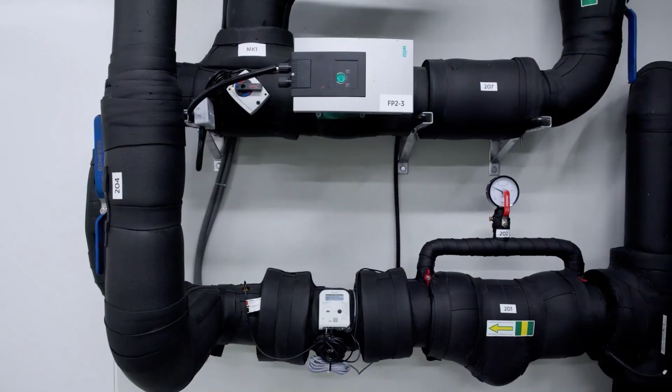This innovative project, developed by the Kaunas University of Technology, KTU, Faculty of Civil Engineering and Architecture Centre for Smart Cities and Infrastructure, focuses on monitoring and managing the CO2 emissions, energy consumption, and indoor climate of the KTU campus buildings. By leveraging state-of-the-art digitization technologies, the project aims to significantly reduce the carbon footprint and enhance the sustainability of the university's infrastructure.

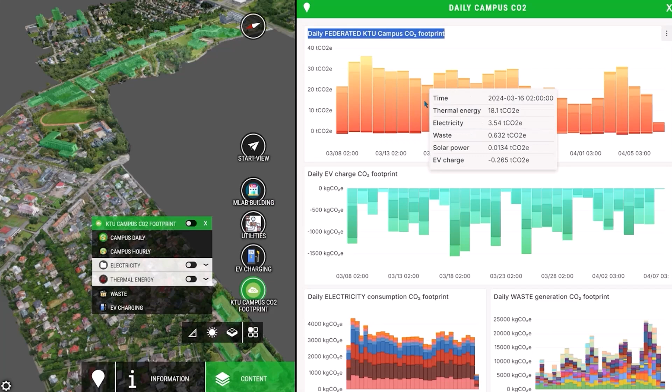The project exemplifies innovation and creativity by integrating advanced technologies such as reality capture, Internet of Things (IoT), building information modeling (BIM), data science, and the use of AI to predict energy consumption and carbon footprint.

The team utilized Bentley Open Buildings Designer to create semantically rich BIM models, iTwin Capture for reality capture, and the iTwin platform for high-level customization and data visualization. OpenCities Planner served as the project's main platform, integrating digital outputs from various software tools and APIs.

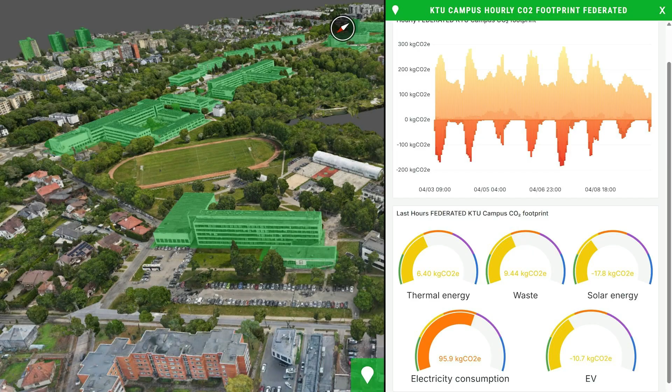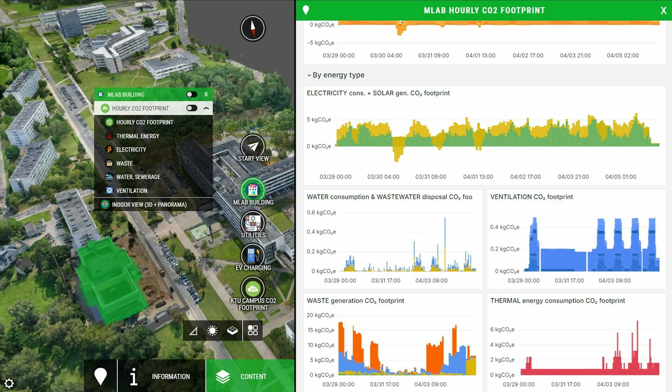By just monitoring and making visible energy, water consumption, wastewater, occupancy temperature, relative humidity, air volume, lighting, noise, CO2 levels, and other significant indicators, KTU is changing behaviors that are resulting in more responsible use and investment in clean energy sources.

In March 2024, the operational CO2 footprint of the KTU campus buildings consisted of 80% thermal energy for heating and hot water, and the installation of solar power plants and EV charging stations contributed to an 11% reduction in the carbon footprint.

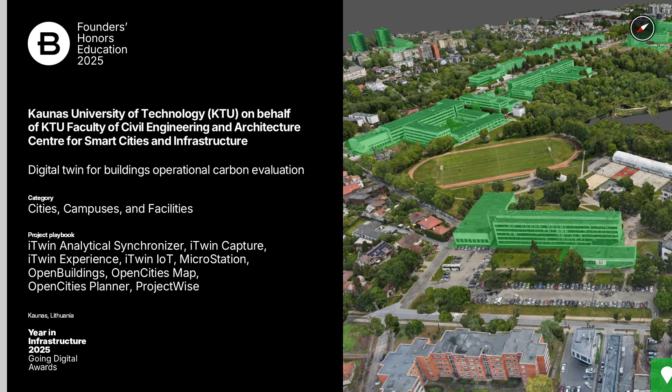Congratulations to the Kaunas University of Technology for winning a Founder's Honor. Your dedication to innovation, sustainability, and excellence sets a new standard for the future of infrastructure.

I am pleased to recognize Cornell University's Environmental Systems Lab for a Founder's Honor for their work on the Energy Atlas, a digital twin for decarbonizing Ithaca's building stock.

This groundbreaking project is a city-scale building stock energy model developed in close collaboration with the city of Ithaca. It supports building retrofit planning, carbon reduction, and sustainability policy implementation.

The Energy Atlas digital twin integrates open access urban data sets, spatial analytics, and national statistics to construct a bottom-up, physics-based urban building energy model (UBEM), that evaluates and predicts energy consumption across all 5,200 plus buildings in the city.

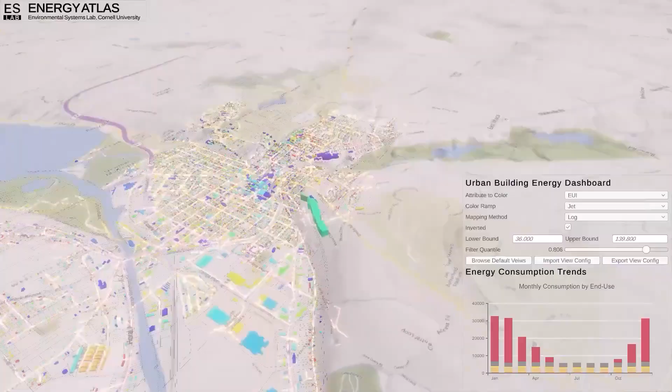The innovation and creativity behind this project are truly commendable. By leveraging artificial intelligence and machine learning, the team has created a high-fidelity digital twin that not only improves simulation accuracy, but also provides critical insights into building energy performance, operational carbon footprints, and retrofit opportunities.

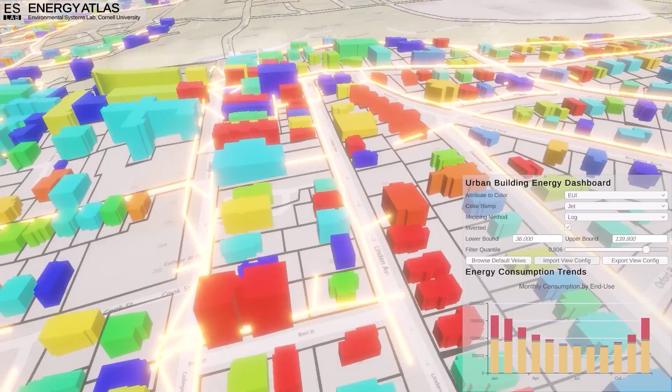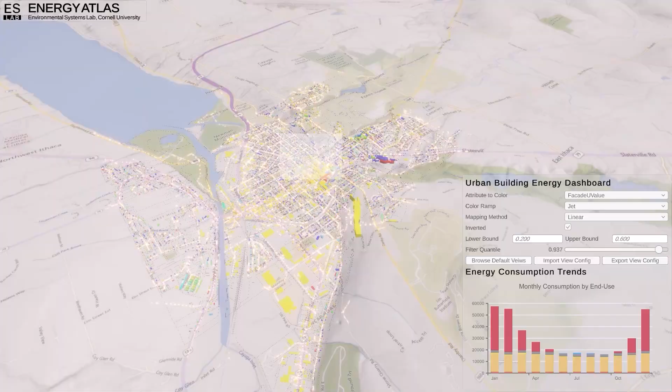This tool empowers city officials, community organizations, and property managers to make data-driven decisions that will significantly impact Ithaca's journey towards full carbon neutrality by 2030.

The use of Bentley Descartes, Cesium, iTwin Capture, and OpenCities Map enabled the team to overcome significant bottlenecks in 3D reconstruction, data interoperability, and model deployment.

The automation of key components in the building reconstruction pipeline saved over 500 work hours, while the integration of Cesium for Unity led to an estimated $500 per month in software API cost savings.

The metrics speak for themselves. The project has the potential to reduce operational carbon emissions by up to 95%, or approximately 104,000 metric tons of carbon dioxide equivalent annually.

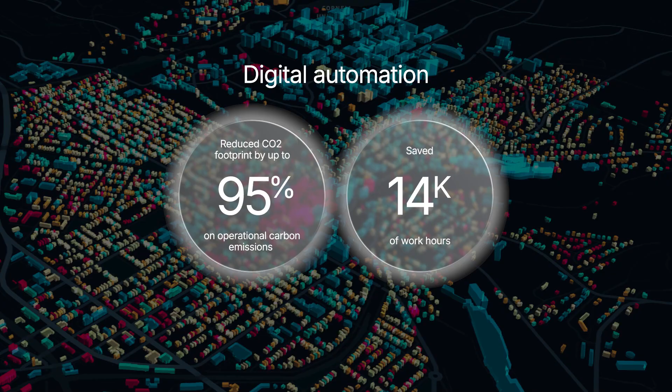Additionally, the use of digital automation saved an estimated 14,000 work hours compared to a fully manual process. These achievements not only highlight the project's efficiency, but also the significant contribution to environmental sustainability.

In conclusion, I would like to extend my heartfelt congratulations to the entire team for their dedication, innovation, and hard work. This project sets a precedence for urban sustainability transitions and serves as an inspiration for other municipalities around the world.

I'm thrilled to recognize citiME's project on micromobility modeling in Abu Dhabi's strategic transport model as the Founders Honors for Sustainability. Abu Dhabi is rethinking urban mobility, and citiME Consultancy is leading the way, integrating walking, biking, and scooter trips into the city's transport planning.

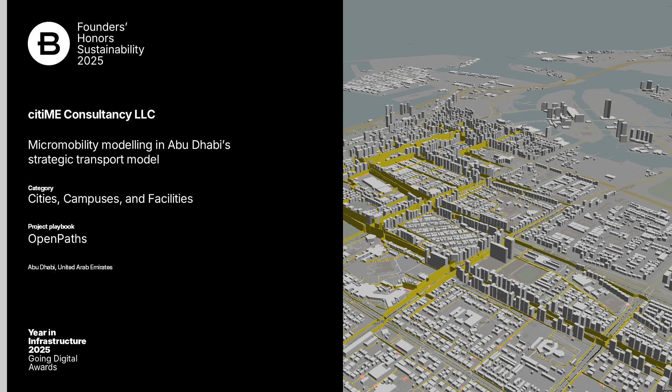citiME's micromobility project uses Bentley OpenPaths to enhance Abu Dhabi's strategic transport model. By accurately capturing short trips, the project helps planners design infrastructure that's efficient, people-friendly, and environmentally sustainable.

Traditional transport models mainly focus on cars, leaving short trips like walking or scootering underrepresented. citiME addressed this with a local area model (LAM), breaking the city into smaller zones to capture how people actually move. They integrated walking, biking, and scooter routes into the network and improved route choice algorithms to reflect real travel behavior.

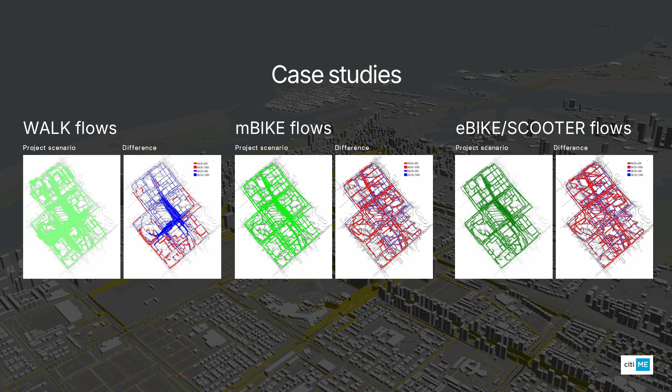The model predicts how people will shift from cars to sustainable modes, helping plan cycle paths, pedestrian routes, and policies that encourage micromobility.

Using OpenPaths and Cube, planners can visualize traffic flows in 3D, evaluate different scenarios, and make data-driven decisions faster. They even integrated additional data, such as building occupancy from energy and water usage to refine travel patterns.

The result is a tool that not only optimizes transport infrastructure, but also enhances social and environmental outcomes. Fewer car trips, healthier streets, and stronger, more connected communities.

Congratulations to citiME Consultancy. This project has set a new benchmark for sustainable, data-driven urban planning. By integrating micromobility into Abu Dhabi's strategic model, citiME and its project are helping the city become more resilient, more connected, and ready for the future.

Over the course of my career, the construction company that I have most looked up to is DPR Construction. DPR has uniquely championed going digital, having institutionalized virtual design and construction (VDC) across their own project portfolio and always advocating for innovative advancements which benefit the state of the art for all.

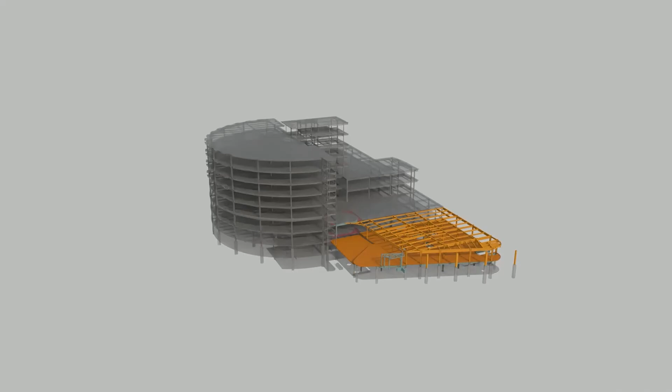That's why I'm particularly appreciative of their nomination of their Hartford, Connecticut Children's Hospital project for its 4D planning with Synchro. DPR is known for surmounting the most challenging projects, but this $300 million hospital addition and expansion is at the extreme, along with adding new capacity for a 50-bed neonatal intensive care unit and especially a rare fetal care and surgery operating room. The infrastructure complexity includes a bridge to a new parking facility.

But it was the schedule and related budget commitments that caused even DPR to seek a creative and unconventional breakthrough beyond their already advanced standard procedures. To save literally months and millions, the permanent rather than temporary heating was to be turned on for interior finishing work before even the final construction documents would be available.

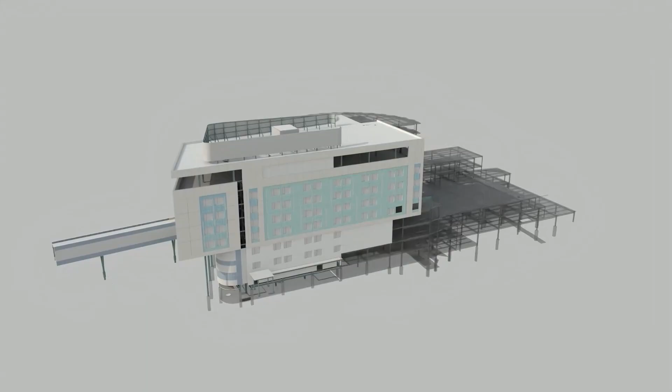DPR describes the redefined workflow which Synchro's 4D capabilities made possible as: plan how you want to build it, then model what you planned, and finally, go build what you modeled.

Using this innovative approach, DPR completed the essential coordination of the mechanical floor a year ahead of schedule, delivering a level of development 400 detailed model 6 months before even beginning work on the steel. The validated construction sequence would then be continuously refined throughout by way of a rolling 5-week fabrication and installation schedule, which created predictability in the labor market.

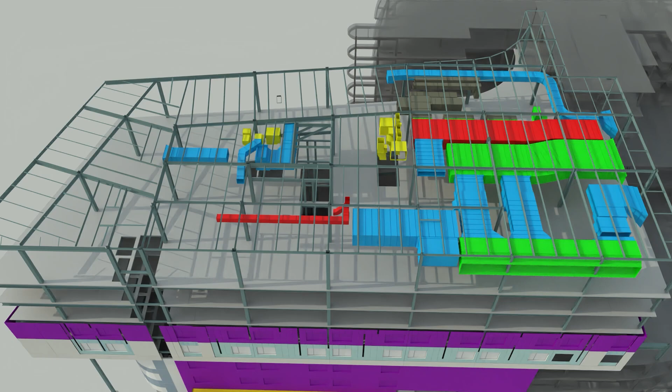Synchro enabled coordination of the 200 on-site workers who understood the visual language better than words. Having precisely predicted what would be installed each week, DPR says, guess what? We hit that weekly production on time, every time.

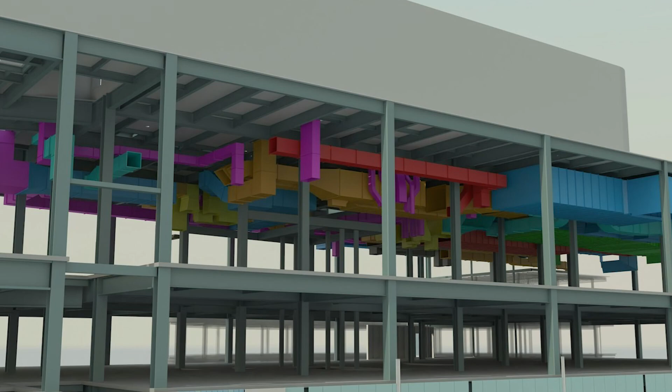You won't be surprised that DPR are experts at quantification and learning about advantages from going digital. See here their reckoning that on this project, which was just completed, among the benefits to improve children's health care in Hartford, coordination efforts, which typically achieve around 5,000 square foot per week on healthcare building projects, were accelerated with Synchro to accomplish 13,000 square feet per week, so that the plan was built before construction documents were even issued.

92% of planned percentage completion was achieved, which DPR applauds as remarkable for such a complex project. DPR estimates that on-site labor productivity was increased by 20% thanks to the 4D modeling and its visualization, and in particular, as to the original motivation to altogether avoid temporary heating, 95% of mechanical, electric, and plumbing (MEP) trade work was completed 6 months ahead of schedule.

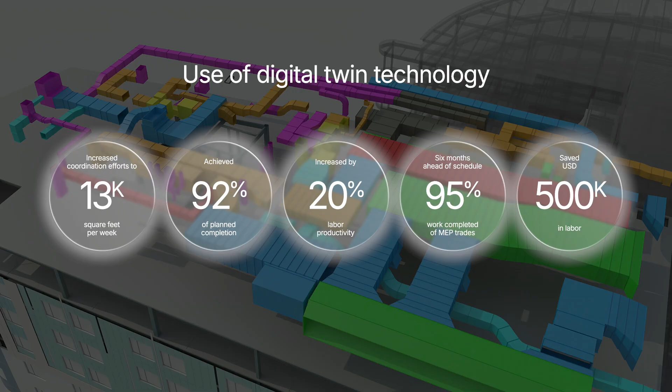And as DPR puts it, digital twin technology was also instrumental in identifying opportunities for cost savings, such as for underground electrical vaults, which allowed for wire pulling before the switchgear was delivered, saving $500,000 in labor.

And here, see DPR's summation of the advantages of Synchro's time machine, which I have less evocatively described as the digital chronology which a digital twin affords: precision, predictability, and the ongoing perfection of project plans. Thank you, DPR, for sharing this advancement, and congratulations on Founders Honors.

At Bentley Systems, we're appreciative of every Going Digital Award nomination, with our users and accounts sharing their advancements for the benefit of all. But understandably, our category jurors are more likely to focus on globally significant projects that tend to be of large scale.

For Founders Honors, therefore, I like to salute projects that are far-flung and representative of our growing population of users in small and medium-sized businesses, SMB. In the case of Synchro users, this can make the case that 4D construction modeling is appropriate and valuable to enable digital twin advantages not only for projects with the largest budgets and complexity, but also the smallest and everything in between.

So I would like to call your attention to this nominated project by 100% Romanian firm Leviatan Group, with an all-in cost of 7 million euros to add 2 services buildings to the campus of a prestigious military boarding school which remained in session during construction.

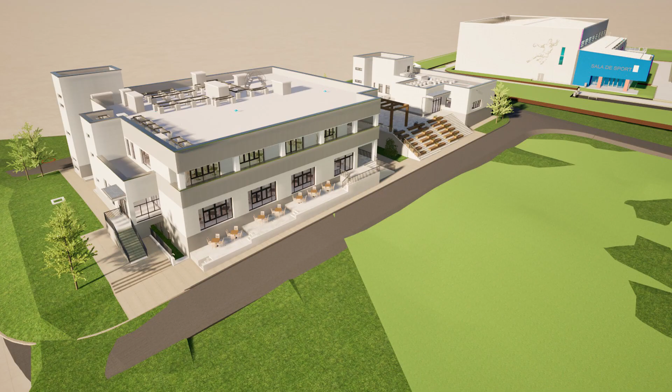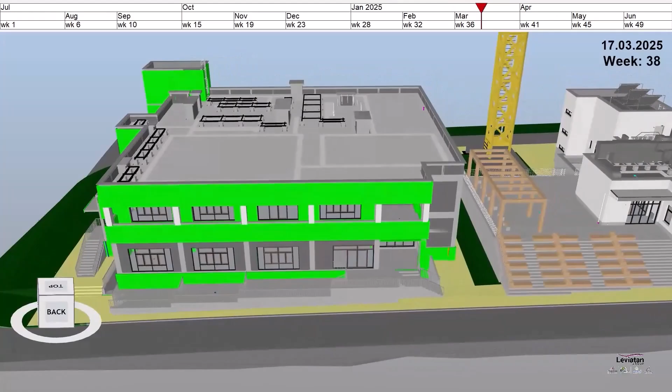General contractor Leviatan undertook to supersede traditional scheduling tools and fragmented spreadsheets with Synchro. Leviatan integrated digital workflows that brought together typical Revit designs and procurement through Autodesk Construction Cloud, but it was Synchro which enabled a comprehensive model incorporating with the physical aspects of the building, as Leviatan puts it, the temporal dimension.

4D scheduling enriched the 3D elements with 470 engineered activities across all phases of construction for real-time visual simulation of project evolution, dynamic clash detection to coordinate 10 subcontractors, site logistics including sequencing, crane placement strategies, and equipment circulation paths, and scenario analysis for potential disruptions such as weather events and to adaptively reallocate resources when supply delays occurred.

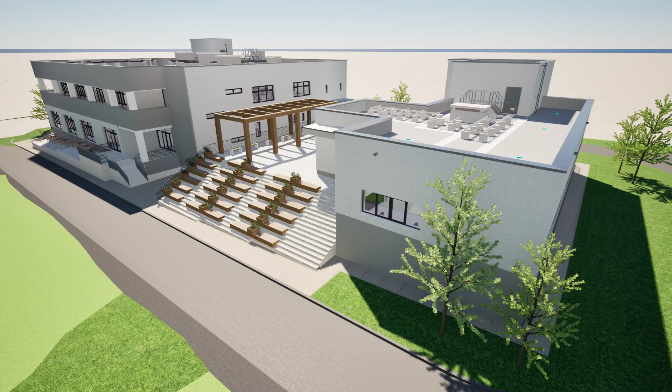By Leviatan's reckoning, quantitative benefits from maintaining full critical path integrity with Synchro and constituent transparency through Synchro control included a 25% reduction in workforce congestion delays, 42% fewer site visits, 35% reduction in construction punch list items, 28% savings in storage space enabling procurement efficiencies, and 18% reduction in carbon emissions.

Finally, the project's social impact not only improved the cadets' life in preparation for their important futures, but transcendently also benefited the future in Romania by, to quote, illustrating the profound potential of digital solutions to deliver sustainable, impactful infrastructure projects.

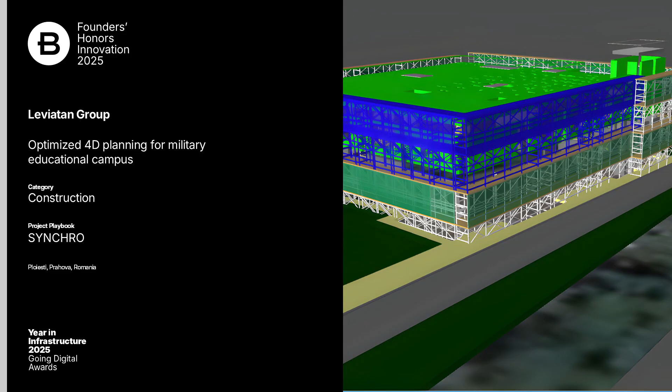Along with congratulating Leviatan for Founders Honors, I particularly thank them for sharing this encouragement to construction projects of any type and scale, anywhere that they found advancing from 3D to 4D construction digital twins by virtue of Synchro to be very easy.

Hello, everyone. It is with great pleasure that we recognize Shanghai Investigation, Design, and Research Institute as a recipient of this year's Founders Honor for their leadership and innovation in offshore wind infrastructure on the Three Gorges project. This landmark project delivered 1,000 megawatts of capacity over complex terrain with harsh marine conditions via 74 offshore turbines and a 330 kilovolts AC booster station.

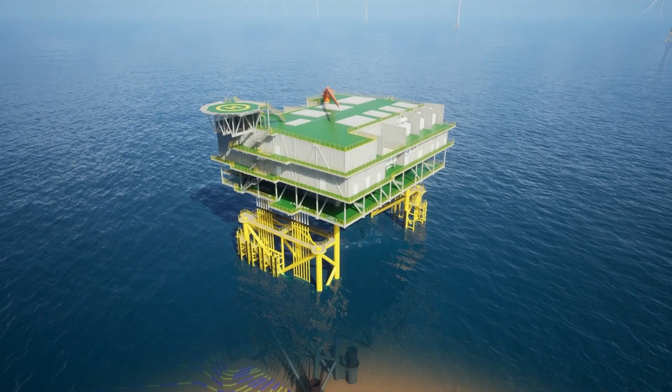The team leveraged Bentley software to engineer massive foundation piles and a 10,000-ton offshore booster platform. Using MicroStation and SACS, they implemented an intelligent design system that enabled them to increase design efficiency by 50%, reduce quantities by 10%, and save over 20 million yuan in construction costs.

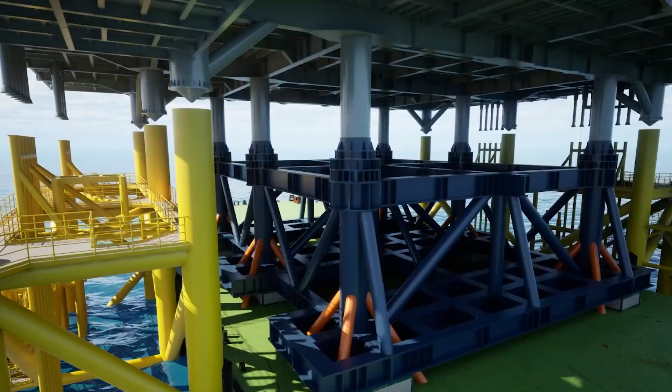During pre-construction, the team used MicroStation, Open Building Designer, ProjectWise, and Synchro to develop a 4D simulation of the build. This contributed to a reduction in the build time of approximately 2 months, resulting in overall project commissioning within 8 months with no reported safety incidents.

Now in operation, this network of offshore wind infrastructure leverages Bentley's iTwin technology to create a real-time digital twin that integrates over 26,000 sensors, reducing safety assessment costs by 30% and operation and maintenance costs by 15% annually.

The project stands as a model of technical excellence and innovation, showcasing how multidisciplinary collaboration and the use of digital twins can unlock efficiencies in project delivery and serve as a foundation for safer and more reliable infrastructure.

Finally, and again, congratulations to Shanghai Investigation, Design, and Research Institute for their innovative use of digital tools, exemplifying digital innovation in the full life cycle of offshore wind power. Their leadership and achievements have advanced sustainability and collaboration, thus earning them this Founders Honor.

Hello, I'm Graham Grant, CEO of Seequent, the Bentley subsurface company. I am so pleased to recognise as a Founders Honour Ormat Technologies.

The island of Dominica in the Caribbean has some of the highest electricity prices in the world, with 70% of their power coming from diesel generators. Ormat drilled geothermal wells over 1,500 metres down to power a 10 megawatt electricity plant that will replace 50% of the diesel consumption. Ultimately, by 2030, the island will be 100% renewable power.

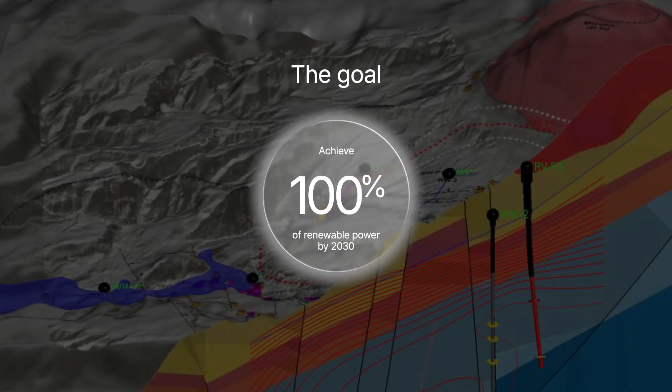To achieve this incredible outcome, the Ormat team has used 9 different Bentley products to design and execute this project, with results that included saving 660 engineering hours, reducing design piping costs by $100,000, and reducing the need for further wells with numerical modelling, saving $10 million.

These results are very significant given the total project budget of $65 million. Here is a quote from Simon Weberson, Vice President of Exploration and Resource Management, on how Bentley's product range is used by Ormat to help provide more certainty, and the impact of geothermal can be unlocking cost-effective energy.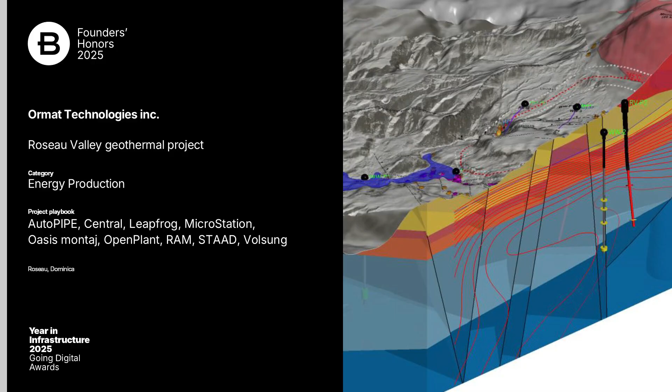Ormat was selected because of the substantial environmental impact they have had on this important island nation. Congratulations to Simon and the team at Ormat Technologies for their Founders Honour.

The geospatial and reality modeling category celebrates projects that demonstrate digital innovation and visualization through reality modeling, 3D geospatial modeling, mobile mapping, instrumentation, and sensor data management.

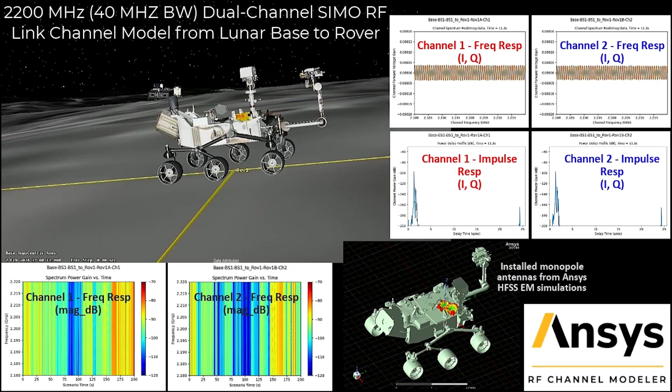We are pleased to recognize ANSYS, RF Channel Modeler, for NASA Lunar Mission Planning with a Founders Honors in this category. With RF Channel Modeler, telecommunication network systems engineers employ a model-based design approach to represent their systems within a physics-accurate digital environment to optimize base station asset locations.

The site planning alternative is to go on site with test and measurement equipment. RF Channel Modeler enables NASA to do this virtually, which is essential because modeling physically on the moon is not feasible. With RF Channel Modeler, NASA performs network digital twin models for ground subscribers on the moon at 1 million to 3 million times faster than traditional digital twin modeling processes while running thousands of iterations. Going digital saves 396 labor hours, requiring only 4 hours per project.

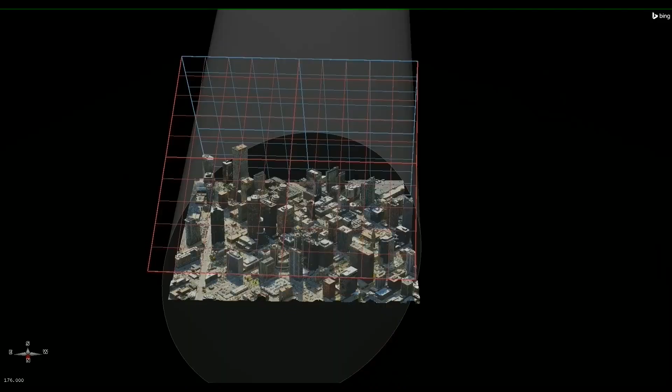RF Channel Modeler leverages the 3D Tiles OGC community standard created by Cesium to consume large data sets such as terrain, 3D models, and geospatial content for electromagnetic simulation, testing, and evaluation. ANSYS STK leverages Cesium Ion self-hosted to optimize user data to 3D tiles, uses Cesium Global 3D content for geospatial context, and utilizes Cesium.js for visualization, saving years of development effort and unnecessary service engagements.

Congratulations to ANSYS for this out-of-the-world use case for geospatial and reality modeling, equally relevant to telecom network and modeling on planet Earth.

The UK's uniquely ambitious High-Speed 2 HS2 project, along with the advancements being achieved by infrastructure owner Network Rail, is paving the way for the full potential of rail system digital twins. This vision is being physically realized through the ongoing Old Oak Common Great Western Railway Station Rail Systems project, delivered by the South Rail Systems Alliance, SRSA, comprising AECOM as the lead design organization, Colas Rail as the principal contractor.

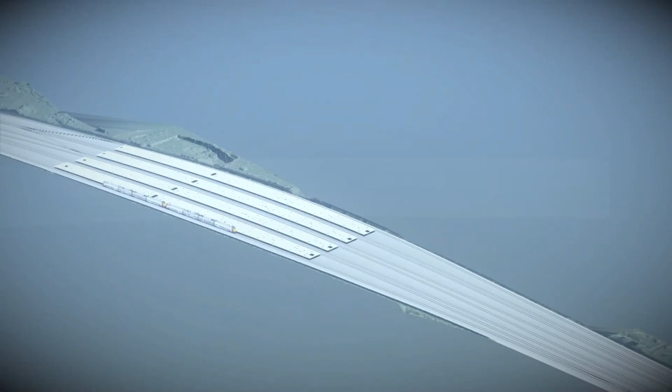HS2 Great Western is expected to handle up to 250,000 passengers per day, making it one of the UK's most complex rail system interfaces, interchanging HS2 with the Great Western Railway network, with Heathrow Express, and with the Elizabeth Line services.

To provision and populate this multi-operator digital environment, SRSA, through the combined expertise of AECOM, Colas Rail, and Network Rail, has leveraged iTwin cloud services to geospatially integrate independent models across coordinate systems. This enables live tracking of design model changes across track, civil, mechanical, and plant disciplines, including throughout 1.5 miles of operational railway.

The Alliance is fully utilizing the UK's established digital ecosystem, OpenRail, ProjectWise, MicroStation, and Synchro, to optimize delivery and sustainability. In the track formation phase alone, the project is requiring over 200,000 tons of cut, fill, and ballast, an effort made more efficient through digital coordination.

A commendable incremental innovation has been the adoption of the Bentley Raceway and Cable Management application, led by AECOM and supported by Colas Rail and Network Rail. This tool uniquely combines schematic and 3D modeling to design and coordinate power, signaling, telecom, and SCADA cable routes.

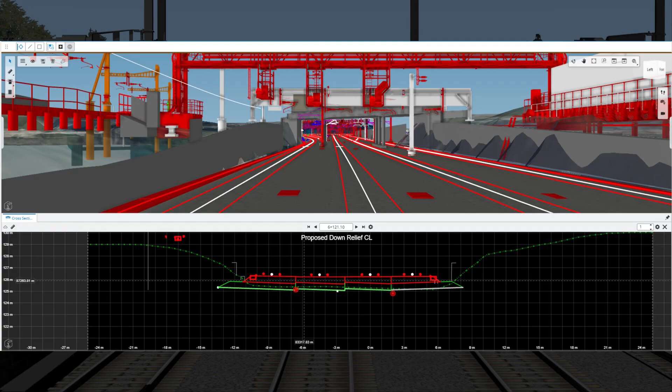It enables pre-construction clash detection in congested corridors, reducing material usage and waste by an estimated 15 to 20%, while improving on-site safety and installation efficiency. Continued support from Bentley is enabling further development of this capability.

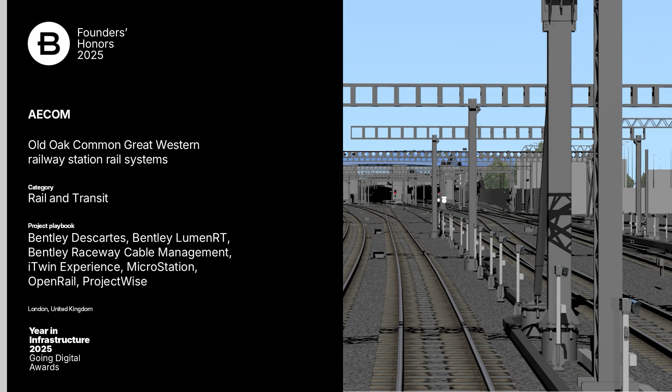For SRSA's collective effort in broadening the scope and benefits of rail digital twins, particularly through the integration of Bentley Raceway and Cable Management, this project stands as a model for future infrastructure delivery. Congratulations to AECOM, to Colas Rail, and to Network Rail for this outstanding achievement, and for Founders Honors.

In Australia, the Pacific Highway Upgrade Program has led the way there in effective digital advancements. But the $2.2 billion 14-kilometer Coffs Harbour bypass presented a new challenge.

Along with highly variable geology and environmentally sensitive areas, including protected rainforests and cultural heritage zones, the steep terrain required not only 20 bridges, but also, a first for Pacific Highway, no fewer than 3 tunnels, totaling more than 1.5 kilometers. For digital engineering lead Arcadis, coordinating over 15 design partners, as they said, traditional workflows were not fit for this scale and complexity.

Arcadis' comprehensive Bentley ecosystem, as they describe, took full advantage of Bentley Infrastructure Cloud, from ProjectWise through iTwin and Synchro, including to enable real-time model reviews and change tracking across all disciplines. This iTwin environment allowed Transport for New South Wales and construction partners to, as Arcadis put it, engage with the live digital twin, driving faster approvals, reduced rework, and clearer communications across all stakeholders.

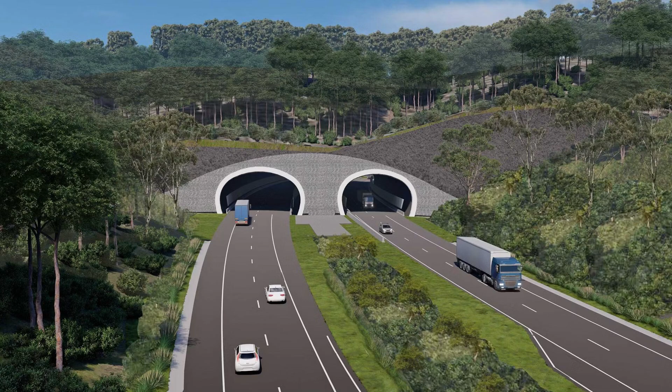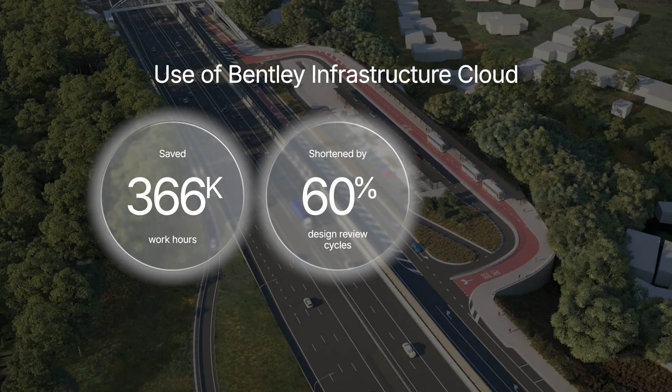Arcadis further combined OpenRoads, OpenBridge, and OpenTunnel to create a robust integrated model representing roads, structures, and tunnel geometry in one environment. Arcadis documented resulting savings of 366,000 work hours through model-based collaboration and digital workflows, plus design review cycles shortened by 60% and the elimination of 22,000 truck movements.

But I would like to give credit to a particular innovation which compounded these benefits, and that is the incorporation of full subsurface analysis through Leapfrog and Plaxis, not only for the tunnels, but also for overall ground modeling, to manage the geotechnical risks, tolerances, and mitigation of landslip, settlement, and structural integrity related to the soft soils, groundwater, and complex rock interfaces.

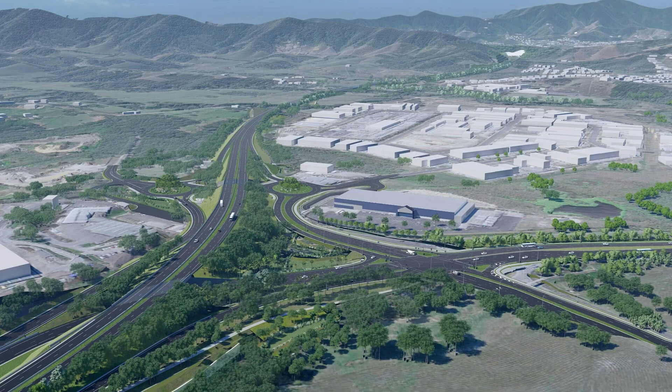The advanced ground modeling enabled early intervention in high-risk geotechnical zones, saving costly field adjustments during tunnel construction.

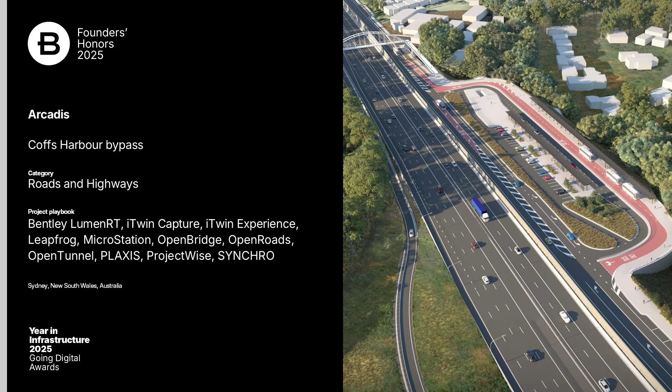By Arcadis' informed reckoning, this digital transformation on the project demonstrated how innovation, sustainability, and efficiency can be scaled, setting a new benchmark for digital engineering in Australia's transport sector, and may I suggest for consideration throughout the world at large. Thanks for sharing the scope of this ambition and the benefits of your innovations, Arcadis, and congratulations for Founders Honors.

I'm pleased to recognize Aurecon with a Founders Honor for their project, Digitizing Urban Ground: Transforming Subsurface Engineering through 3D Geology Modeling. This transformative subsurface engineering project began with Auckland City Rail Link, New Zealand's largest infrastructure effort, and has evolved into a citywide digital twin of underground conditions.

It integrates over 8,000 site investigations into a dynamic 3D model across Auckland, forming the basis for all infrastructure planning, utilizing Bentley Leapfrog Works, Central, and Open Ground.

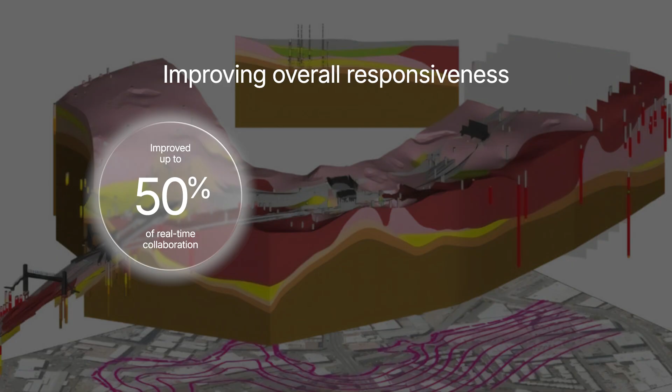There were several standout innovations that Aurecon accomplished in this project. They achieved 30 to 50% improvement through real-time collaboration, 20% reduction of early-stage design time with automation of manual workflows, and alignment optimization reducing response times from days to hours, saving thousands of working hours, all while improving responsiveness on compressed delivery programs. This led to 15% cost savings on average through reducing the need for hundreds of site visits, cutting drilling duplication, haulage, and material waste through the design phases.

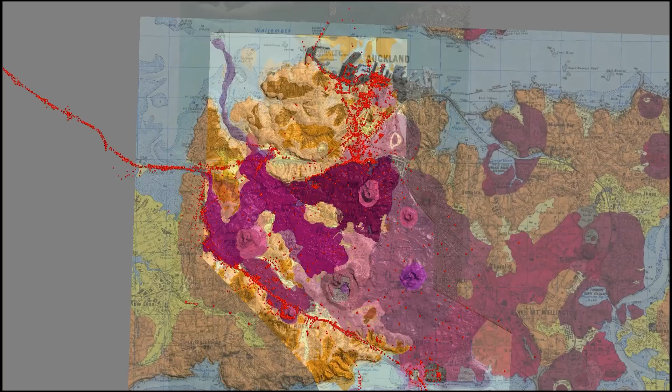All while driving significant reductions in carbon output. Their approach also improved engagement with the Maori iwi via immersive 3D visualization of maunga, aquifers, and heritage areas, contributing to more inclusive and respectful design decisions.

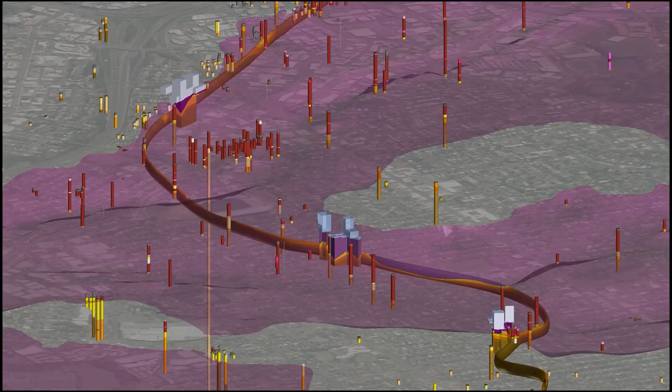Aurecon's innovative approach enables citywide governance, delivering consistent workflows across jurisdictions, enabling competitive advantage and better end outcomes. This approach is now being expanded to other cities like Melbourne and Sydney, promoting consistent workflows and advancing infrastructure digitalization, sustainability, and cultural sensitivity, while importantly demonstrating new revenue opportunities for the firm through data reuse and modeling.

Congratulations, Aurecon, on your Founders Award.

We are pleased to honor Geoambiente from Brazil with a Founders Honor for their project remediating contaminated soils and groundwater. That groundwater was discharging to a nearby surface water body. The site had complicated interbedded hydrogeology that involved the saturated and unsaturated zones.

Underpinned by large language models as well as digitally connected workflows, their solution resulted in considerable savings in time and capital. With so many sustainability challenges facing society, this project shows the potential of AI and digital workflows.

The tangible benefits of the project included a 70% reduction in reagent use, which means $1.4 million in savings, an 85% reduction in contaminated mass, and 2,100 technical hours were saved. They also delivered 45 days ahead of schedule and achieved faster technical approval from environmental authorities.

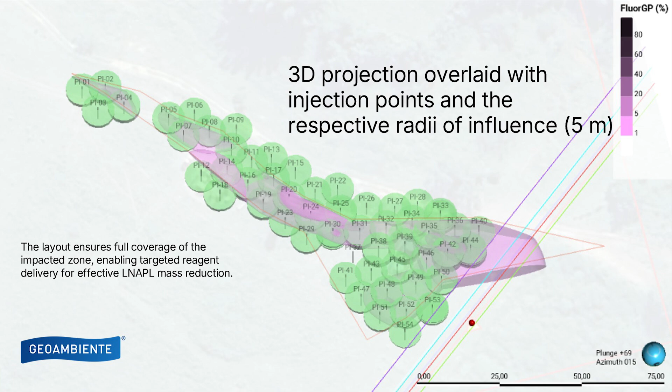Data is always at a premium in contaminated site investigations. Geoambiente's innovative use of large language models to convert historical data into fully digital assets shows where the industry needs to go. That, alongside their digital workflows, transformed a set of raw and complicated data sets into a continuous, integrated, accessible decision-making environment, with direct impacts on the project's efficiency, sustainability, and safety.

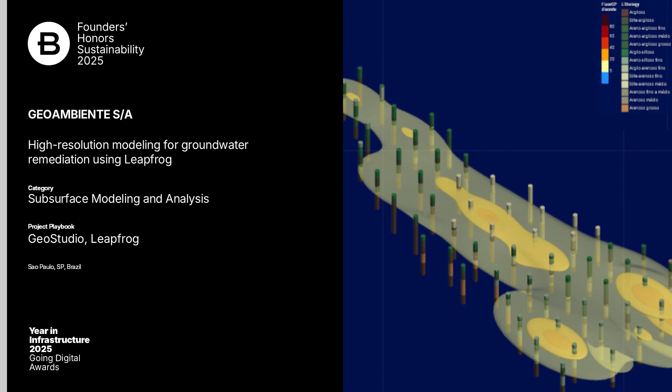Approaches accelerating environmental improvement processes are sorely needed everywhere, and when they also result in such significant economic and environmental benefits, they shine a light on how the industry should behave. We congratulate Geoambiente and Senor Fernandez on their Founders Award for an innovative project that highlights how AI and digital can transform achieving sustainability goals.

I'm really pleased to recognize the Lumut Balai Unit 3 project in Indonesia from PT Pertamina Geothermal Energy as a Founder's Honor for Sustainability. As global energy demand rises, we need bold solutions that deliver clean, reliable power without harming the planet. This geothermal project shows how geothermal energy can speed up the energy transition and boost climate resilience.

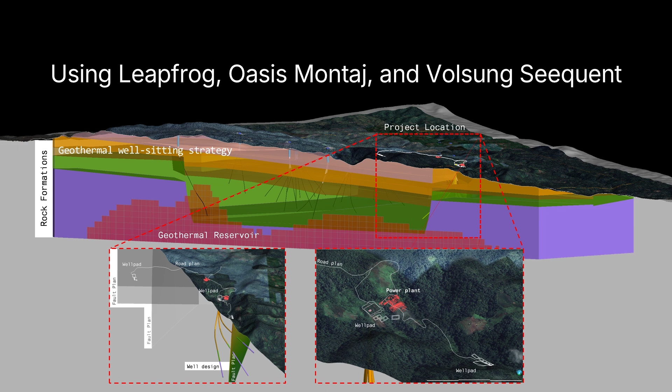The project will generate 55 megawatts of renewable power, enough for 60,000 homes, while cutting 300,000 tons of CO2 every year. Using Leapfrog, Oasis montaj, and Volsung from Seequent, the Bentley subsurface company, the team built advanced 3D subsurface models to guide safe, efficient development.

South Sumatra's growing economy means electricity demand is rising fast, from under 1 gigawatt today to nearly 1.5 gigawatts by 2030. Lumut Balai Unit 3 will provide 55 megawatts of baseload renewable power by 2029, backed by a $33 million investment. What makes this project stand out?

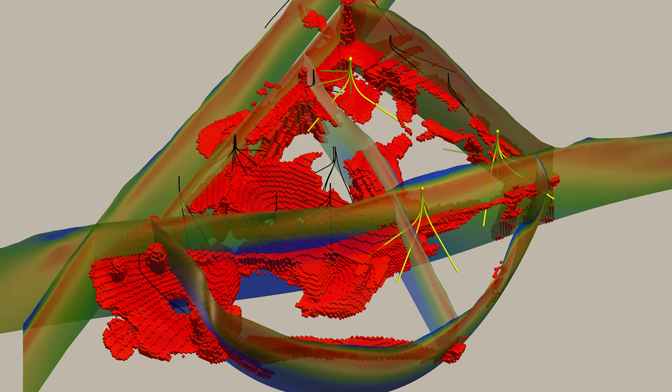Its digital-first approach. By using Leapfrog, Oasis montaj, and Volsung, the team turned paper-based studies into dynamic 3D models. Experts from different fields could collaborate in real time, cutting the feasibility study from a year to just 6 months. Digital modeling also dramatically reduced drilling risk, from almost 50% to 15%, and cut drilling costs by 17%, saving $1.5 million per well. Faster, safer, and cheaper.

That's how innovation accelerates the energy transition while keeping the project commercially viable. And the benefits go beyond energy. Lumut Balai Unit 3 will replace 2,600 barrels of oil per day, expand electricity access to remote villages, and improve regional connectivity with a new 7-kilometer road.

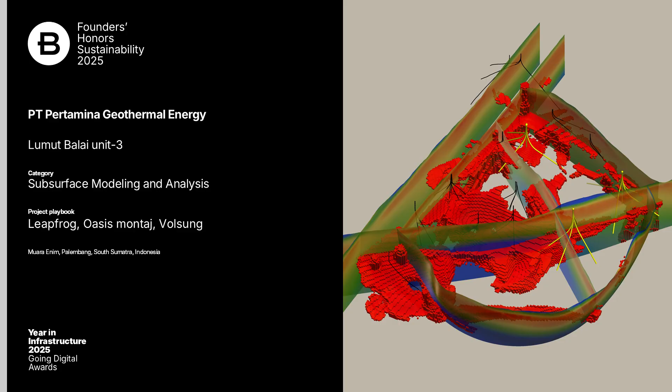This is data-driven geothermal development scaled for real impact. Congratulations to PT Pertamina Geothermal Energy. Lumut Balai Unit 3 shows how digital innovation can unlock geothermal potential, cut emissions, and power communities with clean, renewable energy. This is the kind of infrastructure that builds confidence in a sustainable future.

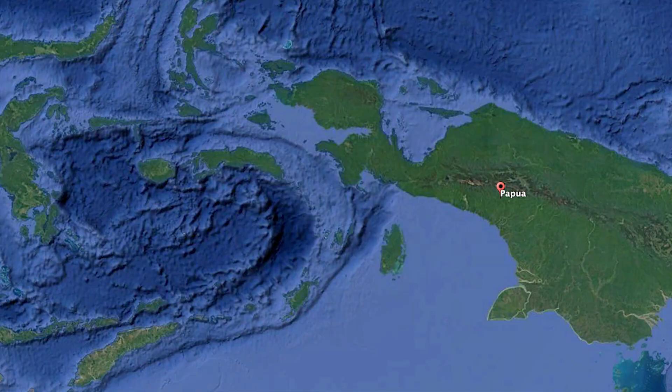Hello, I am Graham Grant, the CEO of Seequent, the Bentley subsurface company. I am so pleased to recognize PT Hutama Karya as a Founder's Honor. The Trans-Papua Road project, stretching over 3,300 kilometers, is one of national strategic significance for Indonesia.

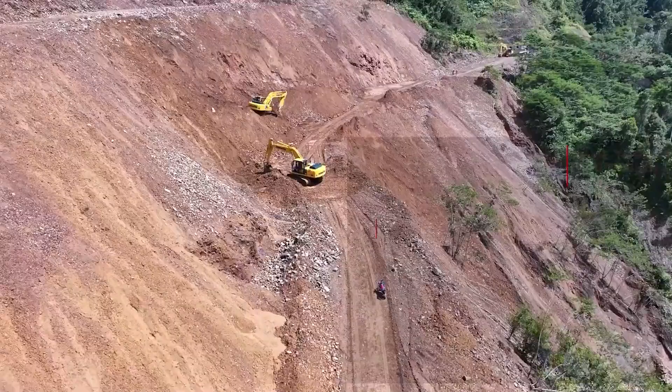The $200 million, 50-kilometer Mamberamo–Elelim section is one of the most challenging parts of this project. It ultimately reduces travel time for these communities by 75%. This reduces dependence on costly air transport, lowers logistics costs, and improves access to education, healthcare, and markets. This brings life-changing accessibility to one of Indonesia's most isolated and mountainous regions.

To overcome the challenges of such difficult terrain, PT Hutama Karya applied advanced geotechnical engineering and digital construction technologies.

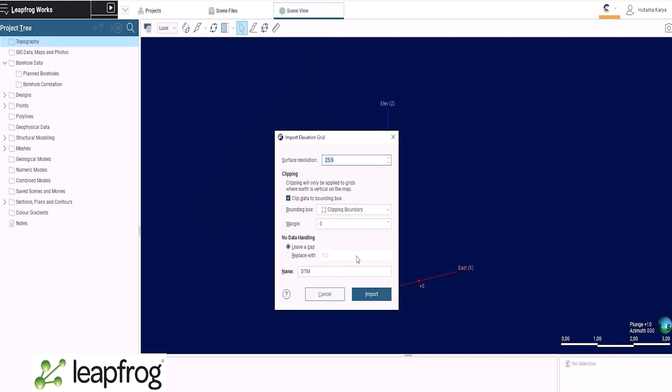High-resolution topographic data was captured using LiDAR and processed using iTwin Capture. Seequent software tools such as Leapfrog, GeoStudio, and Plaxis were utilized for in-depth subsurface modeling and slope stability analysis.

This quote from Amy Rachmadani, VP of Digital Construction, summarized the impact on how these innovations improved collaboration, mitigated risks, and ensured a safer, more sustainable delivery. Overall, they have achieved cost savings of over $1 million and reduced CO2 emissions by 50,000 kilograms.

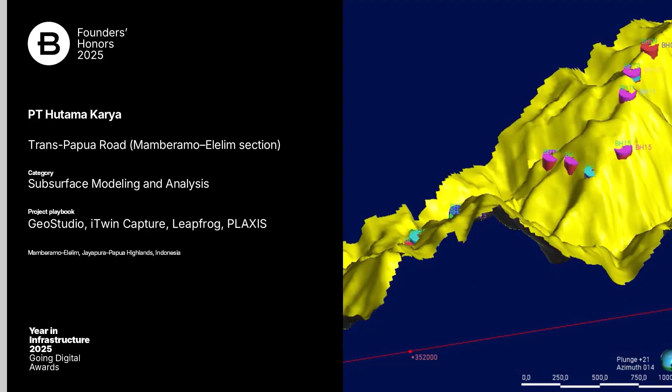PT Hutama Karya was selected because of the incredible project, the first construction of permanent roads entirely from scratch in Papua's most isolated and challenging mountainous region, changing the lives of these communities.

Congratulations to the team at PT Hutama Karya for their Founder's Honour.

It is gratifying to me each year to come across and then highlight a Going Digital Award nomination in which a relatively small company discovers and advocates an innovation in infrastructure engineering which can have widespread and substantial digital twin advantages.

AquaWolf is an engineering firm founded in 2019 in the western U.S., which particularly focuses on improving energy transmission and distribution grid assets. A large utility commissioned AquaWolf to consider whether the utility's established approach for field capture and analysis of distribution poles could be improved by using the most sophisticated and rigorous structural analysis software, Power Line Systems PLS,

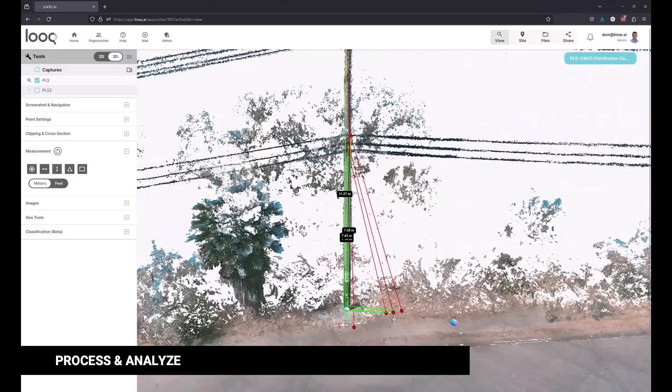in which AquaWolf specializes. To test this proposition, AquaWolf resurveyed and reanalyzed distribution pole structures which had already been conventionally assessed with the legacy tool and processes, originally in that case subject to limitations of potentially inaccurate implicit assumptions.

The results from full PLS models with greatest precision to evaluate real-world conditions of span interactions, loading conditions, and actual terrain alignment revealed significantly lower structure usage values, showing that some poles previously flagged for replacement, at an average cost of $20,000 to $100,000 each, were in fact within tolerance.

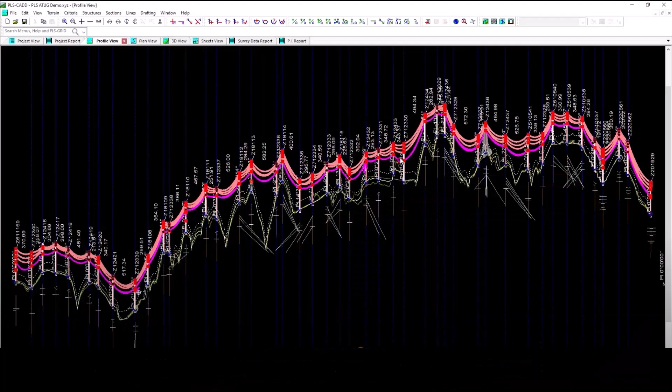This opportunity for optimization and savings, minimizing overdesign and premature replacements while sustaining resilience, can be very significant considering the scope and uncertain condition of distribution network structures. This prospect motivated AquaWolf's principal breakthrough.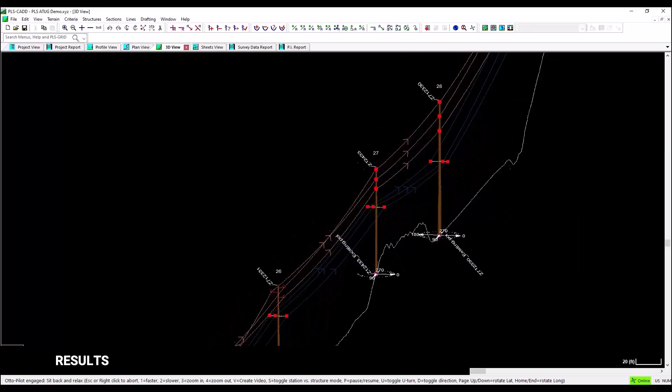The demonstrated superior PLS analysis requires more input precision and is more software intensive. But AquaWolf undertook to develop a new automated survey to modeling process which would require fewer overall resources than the legacy approach. So that, as AquaWolf put it, utilities would not need to choose between capability and cost.

Rather than reducing modeling quality to control budget, they re-engineered the front end of the workflow. Rather than relying on point clouds from traditional LiDAR scanning, AquaWolf took advantage of specialized handheld LOOQ cameras and related software to more directly and accurately derive the needed 3D PLS inputs from LOOQ's overlapping photogrammetric imagery and intrinsic geospatial orientation.

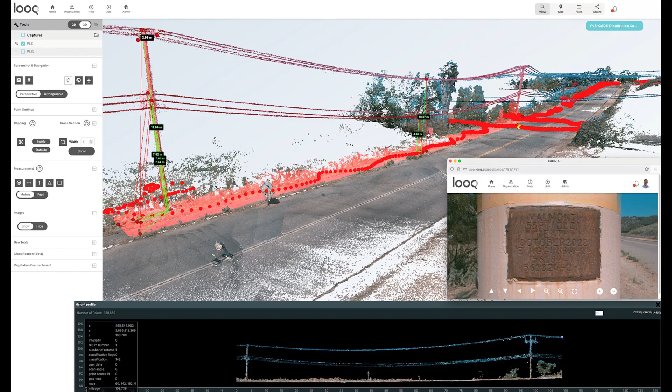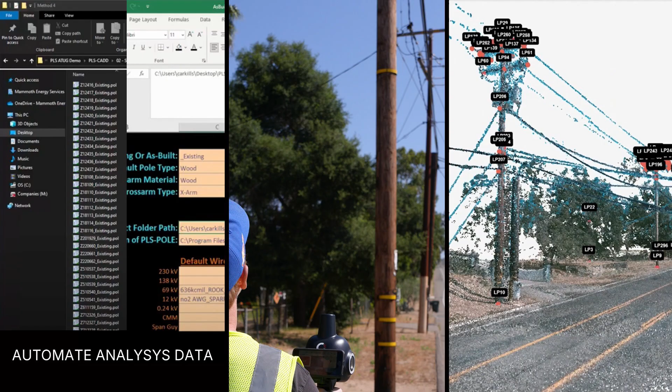As AquaWolf put it, automating the path from field capture to model creation unlocked a new standard for utility workflows combining data automation, digital capture, and engineering-grade analysis in a scalable, sustainable way.

A very worthwhile incremental benefit is the acquisition of high-fidelity survey-grade data as a byproduct of the capture process, facilitating the digital twin potential. AquaWolf reports that LOOQ is further investigating integration with PLS, including by way of Bentley's Cesium platform for geospatial immersion, for accessibility by utilities and their digital ecosystem to field reality as a living asset for resilient, cost-efficient networks. I thank AquaWolf for resourcefully proving out and for so effectively propounding this very promising workflow advancement.

And congratulations for Founders Honors.

I regard that one of the aspirations of Going Digital Awards, and Founders Honors especially, is to bring attention to innovative digital twin applications nominated by resourceful developers of a solution in one geography which could be beneficial much more widely. The PowerChina Electric Power Survey and Design Institute of Henan Province, the most populous in China with nearly 100 million people,

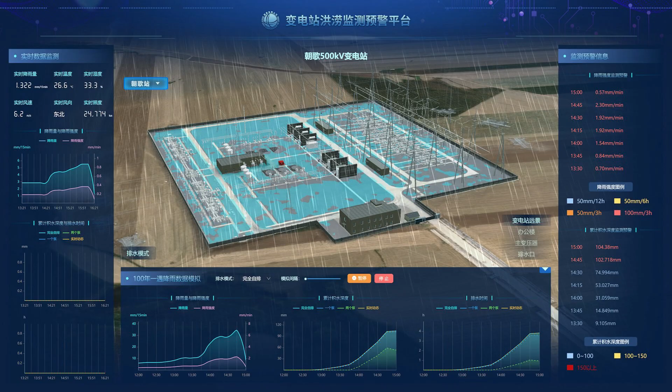Fortunately for its residents and resilience, the Institute has a digital engineering center which has now proactively and entrepreneurially pioneered a digital twin solution, enabling simulations, monitoring, and decisions to protect the performance of this critical infrastructure, starting with the substations at 500 kilovolt capacity and above.

The solution leverages Bentley's comprehensive digital twin portfolio of reality modeling of a substation's physical context, including any applicable flood hardening, and of course the surrounding terrain as derived by iTwin Capture and Descartes from drones and laser scanning,

3D design modeling of the substation's flood-vulnerable digital components in Open Utilities Substation for China, environmental modeling by OpenFlows FLOOD, hydrological computation under flood scenarios of the impact on surface water levels, depth, flow velocities, and scour, and of course all of this integrated with IoT monitoring of rainfall forecasts and real-time rain sensor data.

But what makes this digital twin application stand out for me, and perhaps what makes it now feasible, is the integration of all of this and also some incremental third-party applications, perhaps for the first time anywhere, through Bentley's Cesium geospatial modeling environment and its supported WebGIS framework Python interface development.

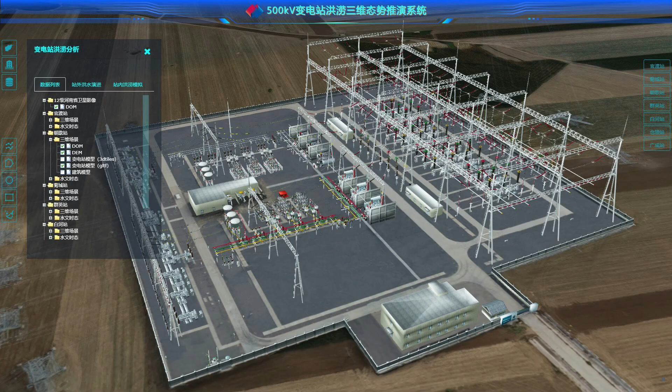This supports, on the one hand, intuitive, immersive visual simulation scenario assessments of flood resilience and potential mitigation decisions for each critical substation in turn, and on the other hand, a provincial flood situation deduction platform for the operational monitoring upon system-generated early warnings of actual rainfall forecast impact across the high-voltage grid.

The system simulation results so far have been validated and adopted successively in more than 10 projects by the State Grid Electric Power Meteorological Joint Laboratory and the State Grid Henan Electric Power Ultra-High Voltage Branch, and are being presented among science-level peers internationally. Next targeted for this approach are the 3,300 remaining substations in Henan, which handle lesser voltages.

I thank PowerChina's Henan Digital Engineering Center for sharing this practical and effective breakthrough for digital twin technology in substation flood control, and my congratulations for Founders Honors. May I suggest to everyone else how compellingly valuable it would be for all of our power grids to be upgraded to the level of flood resilience which this demonstrably enables.

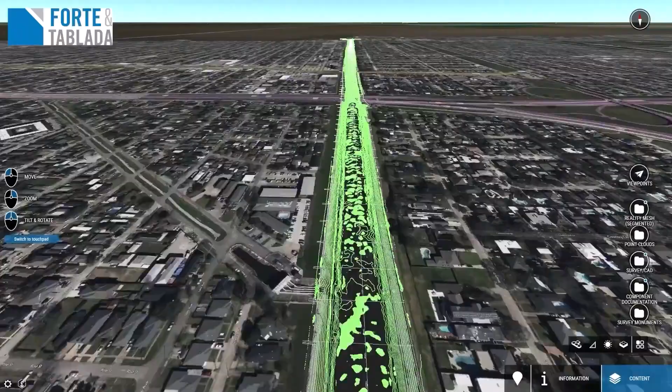The 17th Street Canal Pump Station is a cornerstone of New Orleans flood protection, moving storm water out of the city during extreme weather. With climate change increasing the frequency and intensity of storms, the station's reliability has never been more vital. Partnering with Bentley, Forte & Tablada built a data-rich digital twin that brings together historical drawings, 3D scans, point clouds, and real-time telemetry. The result is a centralized, geospatially accurate platform accessible to engineers, asset managers, and emergency planners.

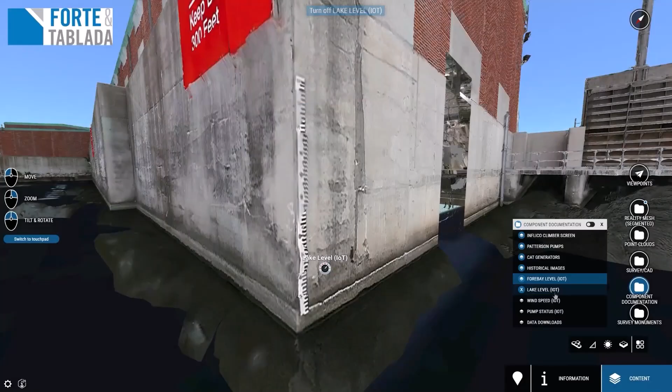The shift from static records to a live, federated model has transformed operations. Engineers can now inspect, measure, and resolve conflicts virtually, saving hundreds of hours in site visits. Over the station's lifetime, the digital twin is projected to save thousands of work hours while cutting costs and reducing environmental impact.

The digital twin also sets a new standard for resilience. IoT sensors and precise geospatial alignment allow teams to track subtle elevation changes, critical in a city below sea level. It's more than an engineering record, it's a foundation for simulations, storm readiness, and collaborative decision-making.

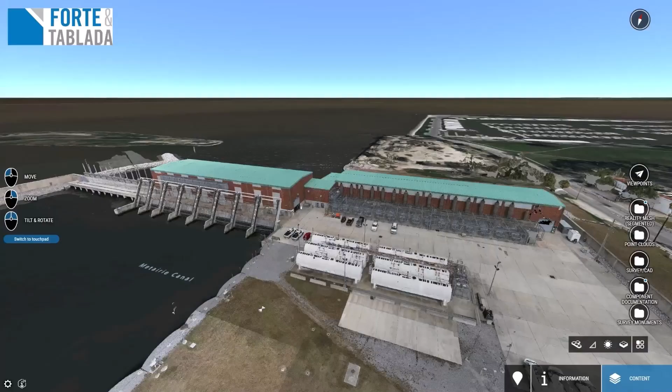By going digital, Forte and Tablada created a sustainable framework that preserves knowledge, reduces carbon from travel, and strengthens public safety. It's a proof point for how infrastructure digital twins serve both people and the planet.

Congratulations again to Forte and Tablada on their Founders Honor. The 17th Street Canal Pump Station digital twin is a breakthrough in climate resilience and community protection. By combining engineering excellence with Bentley's digital innovation, they have delivered a model for smarter, safer, and more sustainable infrastructure for generations to come.

I'm excited to recognize as Founders Honors DC Water. From blueprint to reality, DC Water's digital twin implementation.

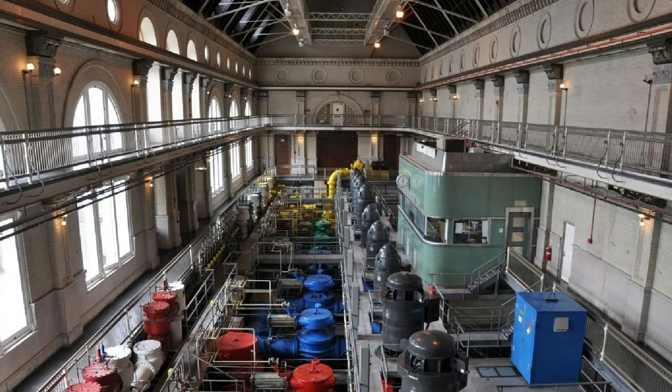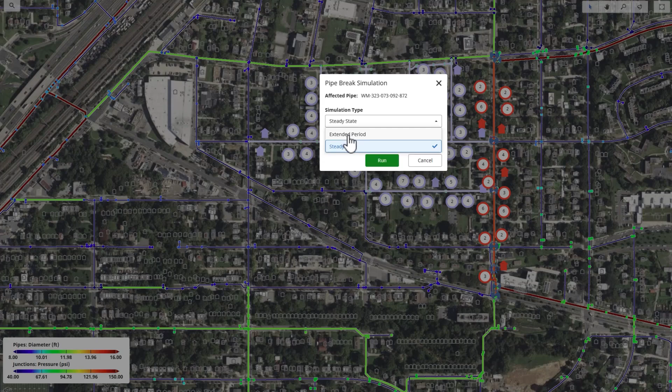DC Water serves over 700,000 residents and 26 million annual visitors in Washington, D.C., with an extensive service area of 1,300 miles of mains, with an average age of 80 years old. In fiscal year 2024, non-revenue water is estimated to have cost $57 million, indicating significant savings potential from improvements.

DC Water aims to enhance its response to leaks and breaks to control costs and maintain service quality, as well as cutting carbon footprint by 50,000 metric tons of CO2, which is equivalent to removing 10,000 cars from the road, through reduced energy consumption and improved workflows, contributing to their sustainability goals.

To address this, DC Water launched a strategic digital transformation under its Blueprint 2.0 plan, selecting Bentley's WaterSight and OpenFlows WaterGEMS to create a real-time, cloud-managed digital twin of its water distribution system. This digital twin integrates data from multiple enterprise platforms to improve reliability, proactive resource management, and sustainability.

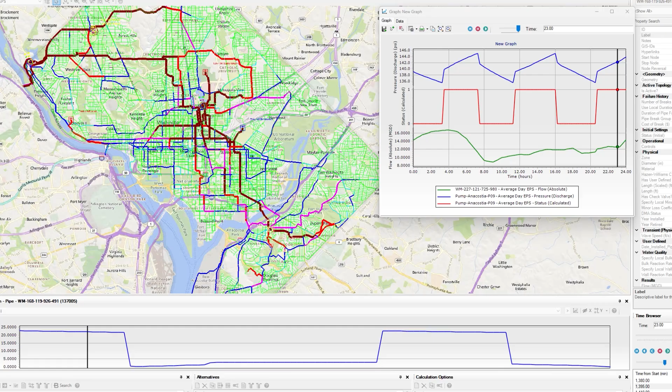A key innovation is the deployment of 120 sensors across 1,300 miles of pipeline, enabling Bentley's Anomaly Leak Finder to detect and triangulate leaks in near real time, supporting efficient maintenance. The system calculates water balancing using production and billing data and compares minimum night flow with hourly consumption to estimate real versus apparent loss.

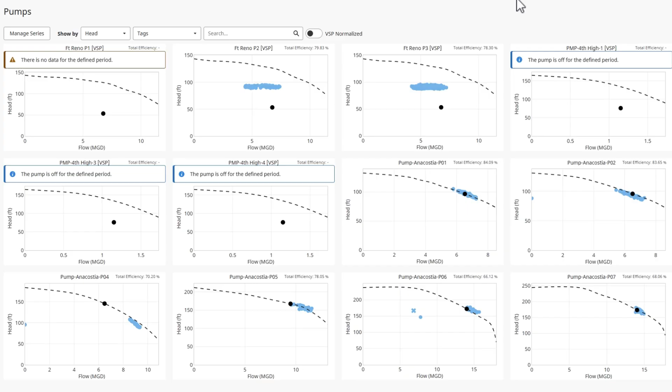By going digital, DC Water has transformed its disparate data, originally gathered to support specific units, into an integrated digital twin, producing new actionable insights, facilitating proactive resource management, and enhancing service reliability and efficiency through sustainable improvements. DC Water's approach sets a new standard for urban water infrastructure, delivering improved service quality and resilience for the community.

Congratulations, DC Water, on your Founders Honor.